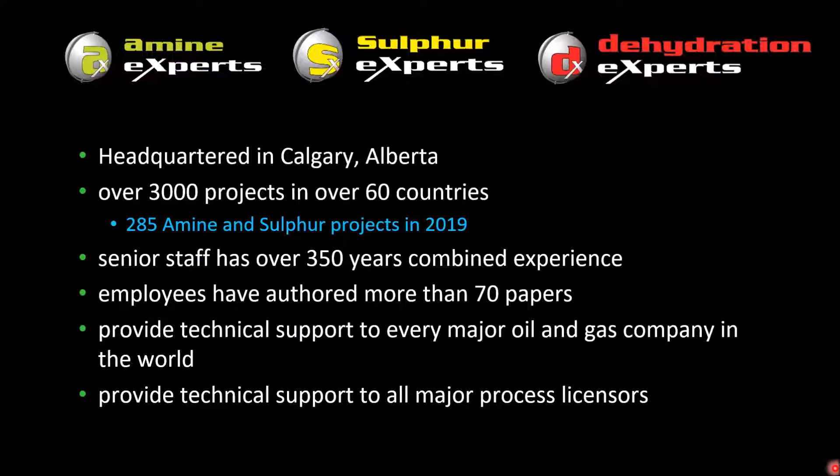So just a quick review of session 1. We talked about the amine process itself. If you can recall, it turned 90 years old last month, and it's a process in which we take sour gas through a contacting device, and with a chemical reaction, we react the amine with the H2S and CO2 to sweeten the gas stream that comes out the top of the contactor.

It's a base contacting an acid, and thus we make a weak salt solution. The salt solution we call rich amine, and that salt is regenerable, and we regenerate it in the regenerator column with steam. Heat helps to reverse that salt reaction. It drives the H2S and CO2 overhead, and that goes out with the acid gas, which can go to a sulfur recovery unit, or acid gas injection, or even flaring depending on what it is, or even venting if it's just CO2. The lean amine that comes back now is cooled, and it's free to go back into the contactor.

So when we talk about some of the problems that we have, when we talk about product quality or meeting specification, we're talking about the sweet gas that exits the top of the contactor here. When we're talking about corrosion, we're obviously talking about anything in the entire process. And foaming is generally going to happen in the contactor and the regenerator.

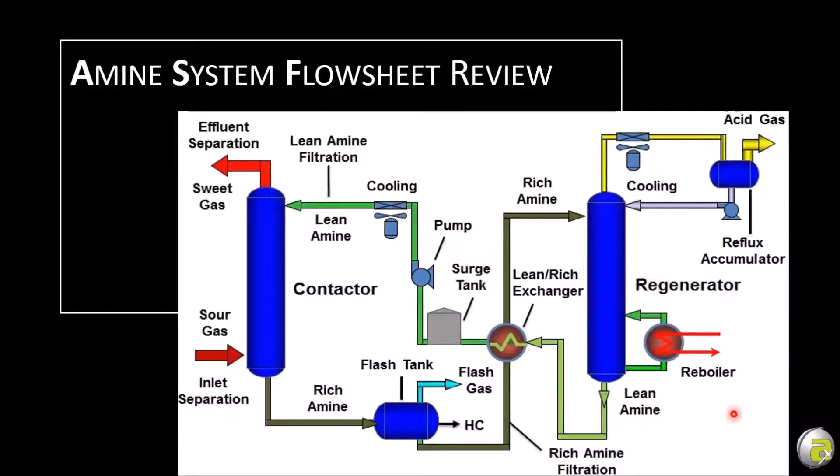So again, we use amine treating for H2S and CO2 removal from hydrocarbon streams. We like to maximize on line time. When I first started in the industry 40 years ago, we had turnarounds every year, but now

we want to run these plants 3, 4, 5 years if we can. So as we get into that 3rd, 4th, and 5th year, it's tougher and tougher to keep on stream, and it's quite challenging. Because the process is 90 years old, we've got a lot of information on it. You can Google amine and read till you're old and gray like me. And the problem is when you've got a problem in your plant site, what do you do? How do you delve into the problem and solve it as quickly as possible?

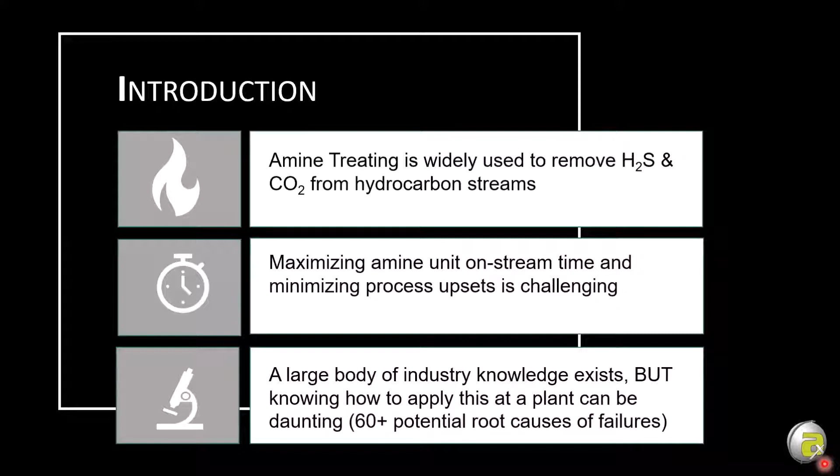The problem is there's a lot of potential root causes. It says here 60 plus. 20 years ago, in 2001, I presented a paper at GPAC called The 7 Deadly Sins of Amine Treating. At the time I said I could have written 7 other 7 Deadly Sins papers because there's so many things that can go wrong in an amine system. So we're going to cover some of those today. Obviously, it was daunting to talk about amine in 40 minutes. It's going to be daunting to talk about this in 40 minutes, but I'll do my best.

So we have a database where we took the data from 400 separate system failures, and we analyzed them completely. Of those 400, almost 300 were ours, and then we took another 100 from the literature. They were basically papers where we knew the author, we did a review of the work that they did and agreed that it was a well-written paper, and that's why we included it. Most of them post 1999, so it would have happened in the last 20 years, say.

And these failures have a cost. They have a cost in lost production, environmental costs, maintenance, and the projects range from 100,000 all the way up to $250 million in lost revenue for the particular client. So failures can be expensive for sure.

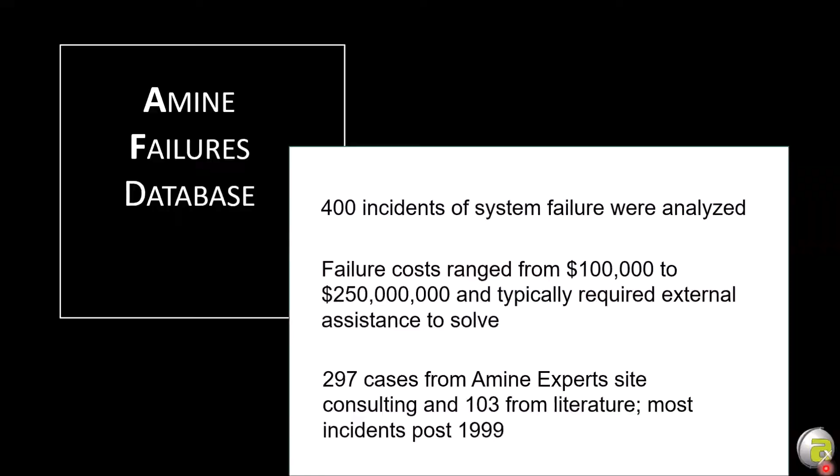Now, we probably could have put this slide together without going through our database, just knowing what we get called to travel the world and troubleshoot on. There's five main ones that came up in the papers, and there's always the 3 that seem to hold court: one is corrosion, one is foaming, and the other one is product quality. What we mean by that is, did I meet my pipeline specification? Did I meet it for H2S and or CO2? There's also some smaller sections on tower flooding or amine losses, but specifically, we're going to spend the rest of this session talking about the big 3 there: meeting spec, corrosion, and foaming.

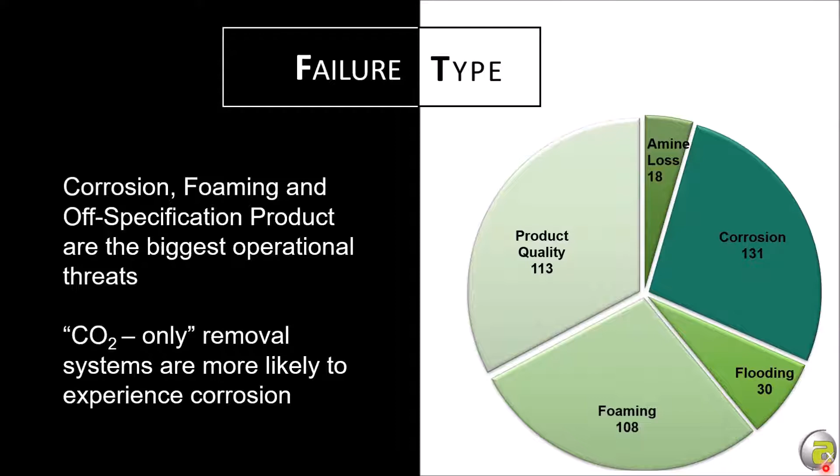So you can gather from that then, if you can do something about controlling these 3 main subjects, you can do a lot to control the downtime of your facility. If you can control your ability to meet spec, keep your corrosion to a minimum, and stop that amine from foaming, you can have a good runtime and decrease the headaches from all the operations staff, that's for sure.

So as far as the way these things lined out, we tried to separate them. We've got one for refineries. We do work in LNG facilities, syngas facilities, carbon capture, but this is strictly from the gas treating focus of our database. The one on the left is processes with greater than 1,000 ppm of H2S in the feed gas, and the one on the right is less than 1,000. So we're calling the one on the right sweet gas. Now, obviously there's H2S in it, and you'd consider it sour gas, but we've just used 1,000 ppm as our limit.

So on the left side, even with sour gas, corrosion, meeting spec, and foaming are still the big 3. And on the right-hand side, as we process more and more CO2 and less H2S, you can see that corrosion now becomes a much larger piece of the pie: 47%. So almost half of the system failures in low H2S facilities are related to CO2.

The simple question that some of you might be asking is, well, why is that the case? What's the difference with high H2S versus low? The huge reason for that is that H2S, although it corrodes steel, it does form a protective film we call iron sulfide. And as you process relatively high H2S gas, you build a nice protective film in all the equipment and piping.

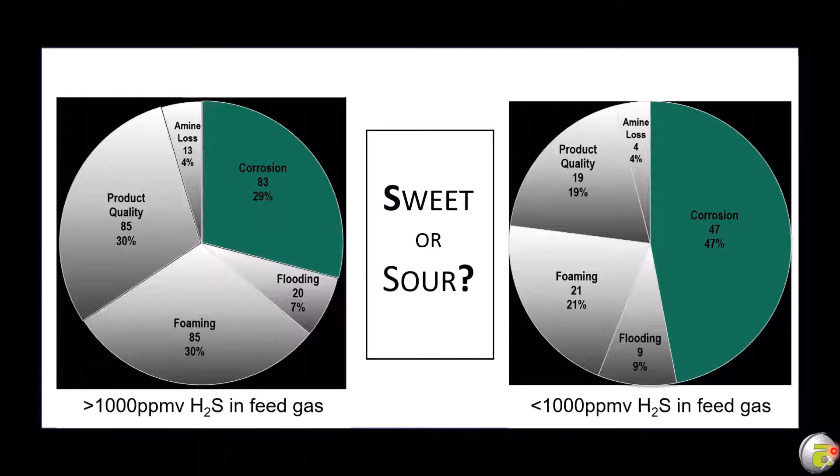So although we hate H2S—it's toxic, and we don't get much for our sulfur—H2S in a gas stream actually does help reduce the corrosion potential because of its ability to form an iron sulfide film.

The first one we'll cover is meeting spec, or product quality. The big question is, if you're off spec, can you afford to flare? Most of you can't afford to do that—you have to shut the plant in. There are jurisdictions in the world where people can get away with flaring for a short or long period of time. But the cost to you is in lost revenue, environmental considerations, and the good neighborly pact you made with the people around you that you will not have these flaring episodes.

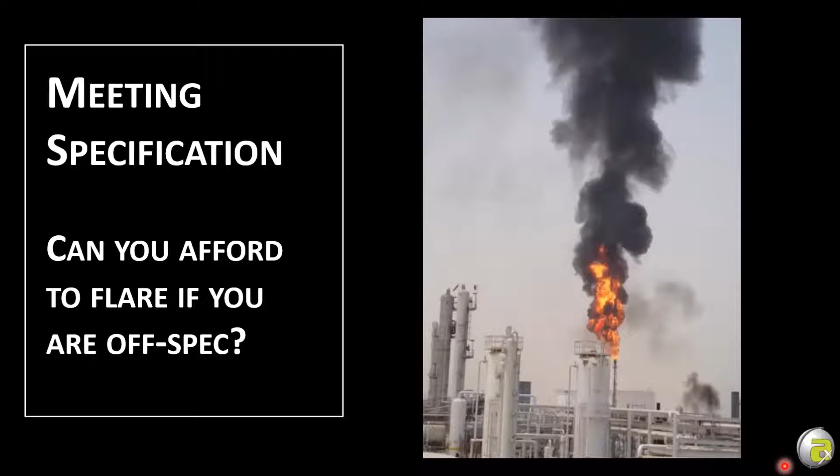This particular picture is from a plant in the Middle East where I did some troubleshooting work, and this flare went for 6 months before they called us. They were flaring 60 million of sour gas with lots of hydrocarbons for 6 months. I liked it because that's how I found the plant—I just followed the flare. Once we solved the problem and there was no more flaring, everyone around thought the plant had shut in, but it was actually processing properly. So you really don't want to have these kinds of environmental excursions.

As far as H2S spec, most jurisdictions in the world are trying to meet less than 4 ppm, sometimes 16 ppm allowable, but with most gas processing we're trying to reduce H2S to extremely low levels to sell it. If we want our amine to do the best job of meeting that tight H2S spec, there are 3 key things we have to pay attention to. The first two we'll call the quality of the amine: the quality of our treated gas—how low the H2S spec is—and the quality of the amine, which is the loading and temperature of the amine that feeds the top of that tower.

We want that lean amine loading—how much residual H2S is left in that lean solution—to be as low as possible for the solvent we're using. That means regeneration is important.

We have to drive the H2S out of that amine solution properly inside the regenerator column. And on the other hand, the lean amine temperature—the lower the better. Cooler amine has a higher capacity to absorb acid gas, which is a big benefit in meeting spec. The secondary knock-on benefit is that cooler amine temperature tends to mean cooler treated gas temperature, which means for any downstream dehydration, the cooler gas holds less water, putting less load on your downstream dehydration equipment.

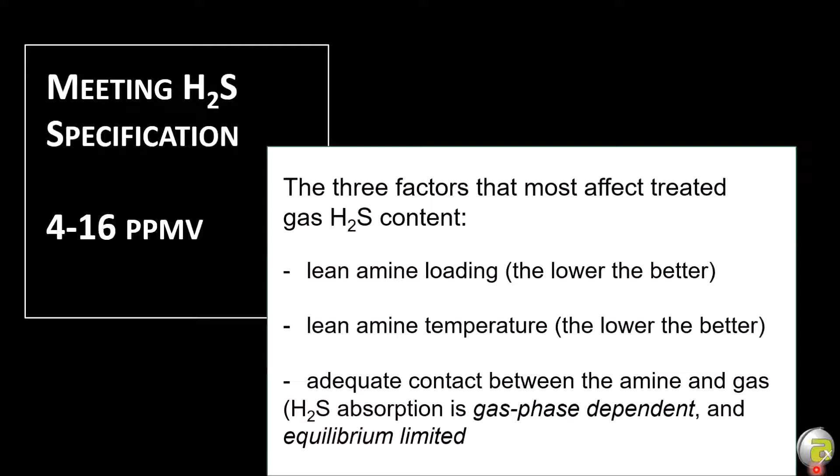For CO2 spec, typically pipeline spec is less than 2 mol%. If you're feeding gas to an LNG facility, we need CO2 down to less than 50 ppm, because CO2 freezes in the cold parts of that facility when we're liquefying the natural gas. So we need to keep CO2 out.

CO2 needs cool amine, good contact, and a well-regenerated solution, but also remember that different types of amine react differently with CO2. Primary and secondary amines, like MEA or DEA, react very strongly with CO2, so we tend to leave ppm ranges of CO2—they can easily meet pipeline spec. Tertiary amines, like MDEA, and hindered amines like Flexsorb, allow for slipping some of that CO2, so we can custom-make our process.

Now, especially with MDEA or MDA type solvents, which most of us are using nowadays, the CO2 absorption is kinetically limited. The warmer the temperature, the more CO2 reaction there is, but the warmer the temperature, the less capacity the amine has. So we always have to be concerned about temperature, and we tend to say it's liquid phase dependent.

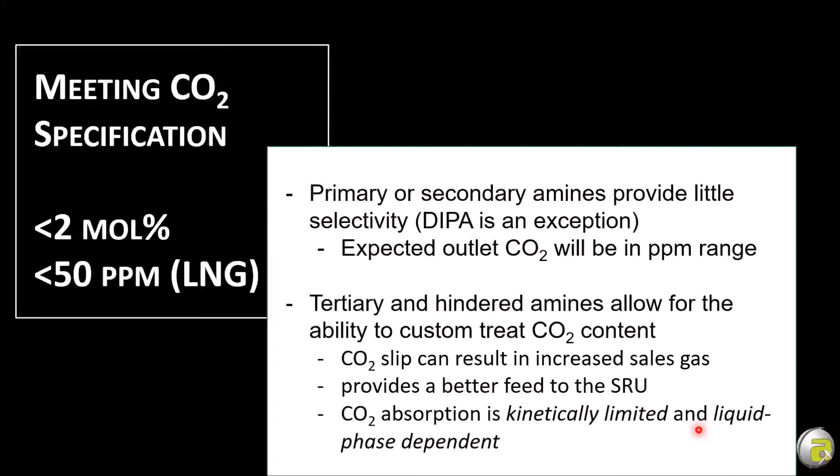H2S absorption is rapid, almost a surface reaction, whereas CO2 is more bulk fluid reactivity. So CO2 removal depends a lot on how much amine I pump into that tower, or how high the weirs are in our tower to give us a higher liquid level on each tray. So we say it's liquid phase dependent.

Now, what did the database tell us about meeting spec? The biggest one was high lean loading. Down here at 38 of all the opportunities, 32 was insufficient heating or cooling, which is basically the temperature. Here's the quality of the amine, the loading, and the temperature. And also we've got contact.

So mechanical damage and insufficient contact kind of go hand in hand. If the towers or trays are damaged, we don't get good contact. So these two are kind of hand in hand.

And we found exactly what everybody says: if you can regenerate your solvent and keep that temperature in control and make sure the contact is working, then you're going to minimize the majority of your problems with meeting specification.

Some of these other ones, like the phase envelope - if your amine is colder than the gas, you're going to condense hydrocarbons out, so that can be problematic.

Under circulating is a problem where you don't have enough amine into the tower to account for the quantity of H2S and CO2 that are in the feed gas. Amines cannot infinitely hold acid gas.

They get full, like we do at a buffet. So if you don't pump enough amine into the tower, eventually it gets full, and whatever H2S has not been previously absorbed will pass right through the tower and go out with sales.

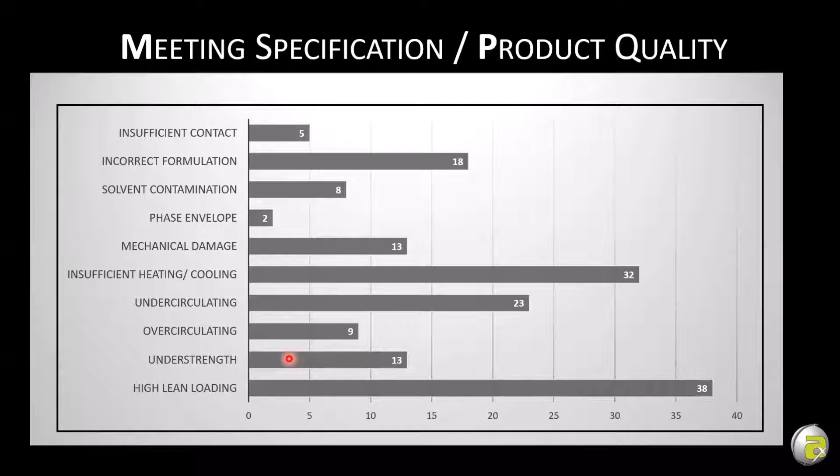And under strength - you need to have a certain quantity of amine in your circulating solution to account for how much H2S and CO2 is coming in with the feed.

So a couple of pictures, a few things. This was a plant that was supposed to make less than 100 ppm of H2S. It happens to be a refinery, but I can show you the pictures. They were actually processing at rates above 1,000 ppm on the outlet of the contactor.

So obviously something was wrong. We went through all the amine parameters. They were circulating the right amount. It was well regenerated, the temperature was good, and it's still not working. So what can you do to check?

One of the things you can do is run a gamma scan, which we show in the top right corner here. Typically a gamma scan will show where every tray is. And if any of you have ever seen a gamma scan, you know that this particular picture shows there aren't any trays in this tower - they're missing, or parts of them are missing.

So when they shut the unit down and we went inside, all the trays had completely buckled. There wasn't a tray left in position. And obviously if there's no trays, you don't have intimate contact between the gas and the liquid, and there's no removal of H2S. It did a remarkable job taking it from 2% down to 1,000 ppm of H2S with no trays, but we certainly don't want our towers to work that way.

High temperature - we don't have this problem so much in Canada, but I understand there might be some Middle East people who have checked in here today, where ambient temperatures can exceed 45 degrees. It's a big problem.

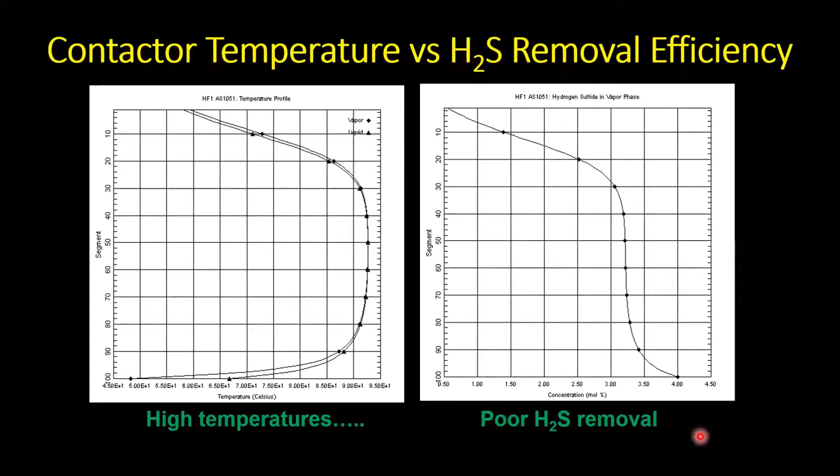So temperature is a huge issue. This is a particular client that couldn't meet spec. This is a CO2 removal facility for an LNG facility, and they could not meet spec. When I ran the simulations, this is the simulated temperature profile.

We don't like to have amines above 85 degrees C because they have the potential to liberate acid gas, and at high temperature they also don't want to absorb CO2 or H2S. So they didn't believe the simulation. We went out with a thermal imaging camera and took a picture of the contactor, and you can see it's white hot in many cases, which is more than 95 degrees, matching the simulation. So when we have an extremely high temperature inside the contactor, it's bad for corrosion, bad for performance.

But how do we solve that problem as quickly as possible? The key is when we have an excessive temperature in the tower, we need to pump more cold amine into that tower to drive that temperature down and out of that column. So in this case, we have to raise the circulation rate by 20%.

And the simulation predicted a typical profile where all the heat's at the bottom few trays of the tower. We have a nice cool top of the tower, 40, 43 degrees, lots of capacity, lots of absorption. Then we went out and took the thermal imaging camera, and you can see that the simulation matched what the thermal imaging camera showed. Nice cool 40, 43 degree top part of the temperature, lots of final absorption, easy to meet spec, all the reaction at the bottom of the tower and at temperatures less than 85 degrees.

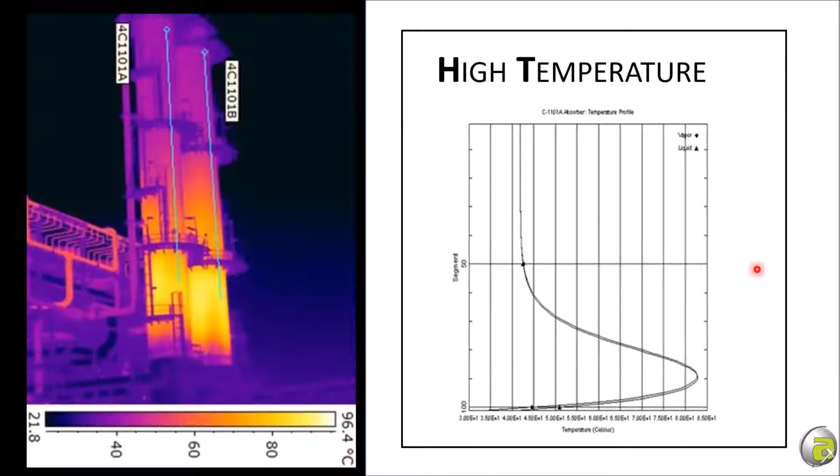So if you have a simulator, you can predict trouble, and you can use a thermal imaging camera to make sure that you're actually seeing it. But these are all tools that you can use to improve performance at high temperature. So that's it for meeting spec. In the interest of time, we have to get on to corrosion.

Corrosion has many aspects. There are three separate ones here. The first one is galvanic corrosion. What you're looking at is a regeneration tower from a plant in Alberta. They could not regenerate the amine, even though they had a high overhead temperature and the steam was getting to the top.

They took the plant down, and on every single tray in the regenerator, there wasn't a single valve left on any of the trays. So the reason they couldn't regenerate is because they can't hold liquid on this tray deck, because there are massive holes on the tray deck. What you're looking at here, if you can see my pointer, there's a valve. Now that valve is a smaller diameter than the hole. Originally, that hole was a smaller diameter than the valve.

The reason we got a galvanic effect is because we have stainless steel valves on a carbon steel tray deck. Wherever that valve lifted and dropped and rotated, it contacted the carbon steel and ate up the carbon steel. So it looks like somebody came with a hole punch and just made larger holes here, but that's galvanic attack. Very sharp defined edges, and this tower doesn't work because of corrosion based on really bad choices to put dissimilar metals on a single tray deck. Never use stainless steel on a carbon steel tray deck.

This one was related to poor design of a reboiler bundle. This is also a plant in Alberta, and the reboiler bundles are completely chewed up here. As you can see, there's no steel left in many of these places.

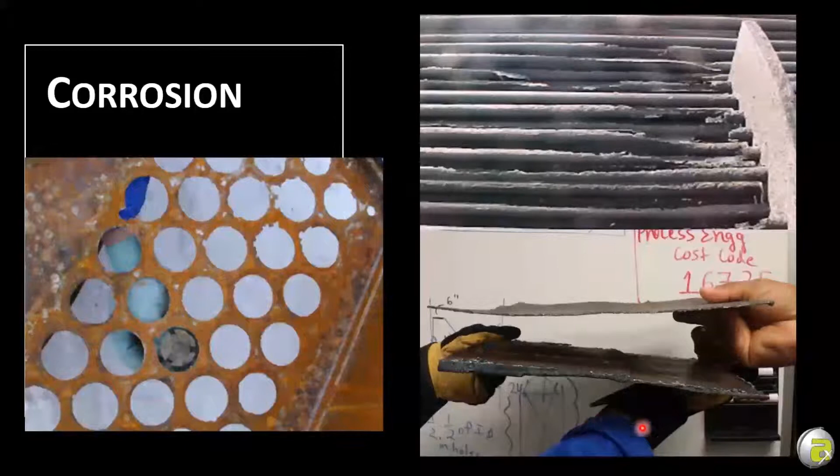A heat-stable salt is whenever I get a stronger acid than H2S or CO2 into my process, it reacts with the amine and makes a strong salt, and the salt is non-regenerable. So we say it's heat stable. We can't break that salt apart. So it builds up, and because we're retaining an acid, it drops the pH of the fluid and the acids attack the steel. So many different ways that we can get corrosion.

So what did our root causes say? The highest one of all was understripping, and also high lean loading. So 52 and 27, that's almost 80 percent of the total root causes related to failure to properly regenerate the solvent. We cannot be leaving high H2S in the amine that goes down to the reboiler and in our lean piping, because a lot of that lean piping is hot. We have to remember that corrosion is a chemical reaction, and all chemical reactions proceed faster and more aggressively at high temperature. So whenever we've got acid gas and high temperature in the same place, we're just asking for trouble.

We've got issues with design. I guess we can loosely put most of these problems related to design. We've got some operational issues, and we always have amine hygiene issues. How do we take care of that amine solvent? Do we build up a lot of heat-stable salts? Do we not filter it properly? Is it degrading because of temperatures or what's coming in with our feed?

Did we design the right metallurgy for the application? Did we overload that solution on the rich side? Did we not size the piping correctly? Is there vibration in the reboiler bundles, in the piping?

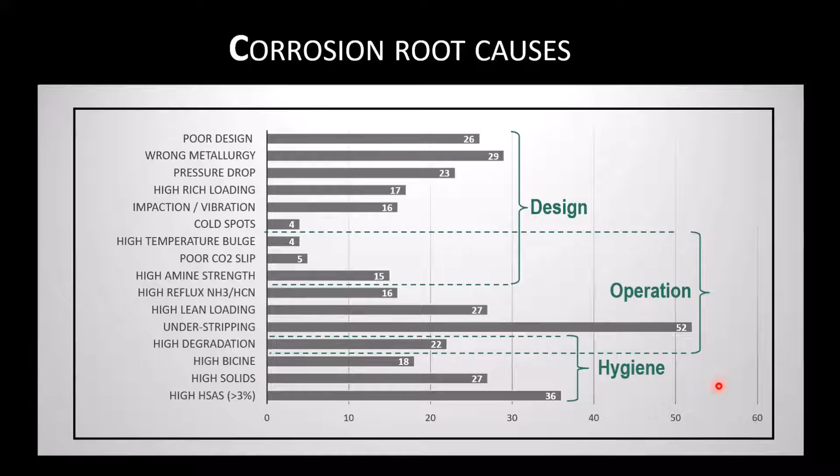So this is a really interesting part of the database: where exactly did the corrosion occur? I'm going to start here at the bottom where it says system-wide, 15. So out of these 131 cases, only 15 are what we would consider system-wide, which means there was corrosion in the reboiler and the absorber and piping, and it was all over. Not all from the same mechanism, but they had system-wide corrosion.

Now, one thing you will note is that if you're operating a plant or you're an engineer in charge of that plant, corrosion is generally highly localized. You never go to a plant turnaround and see corrosion in every piece of equipment. Corrosion is very highly localized. So this number made sense to us. And a number that might not make sense to many of you is if you understand that H2S and CO2 are corrosive, and you look at an amine flow sheet and say, okay, where's the most acid gas? It's right here, and it's right here in the rich amine solution, and obviously up here in the acid gas.

Right here where the rich amine comes out of the bottom of that absorber and then into the tower, this is the most highly loaded part of that amine solution, yet it only has 9 corrosion events. The ones on the lean-rich exchanger were primarily on the lean side, so really only 5 events on this rich piping, and that's where we have the most acid gas.

So how does that make sense? It makes sense because this temperature is moderated here. It isn't until we start to heat up the rich amine that we can have rich amine issues. So temperature is a key.

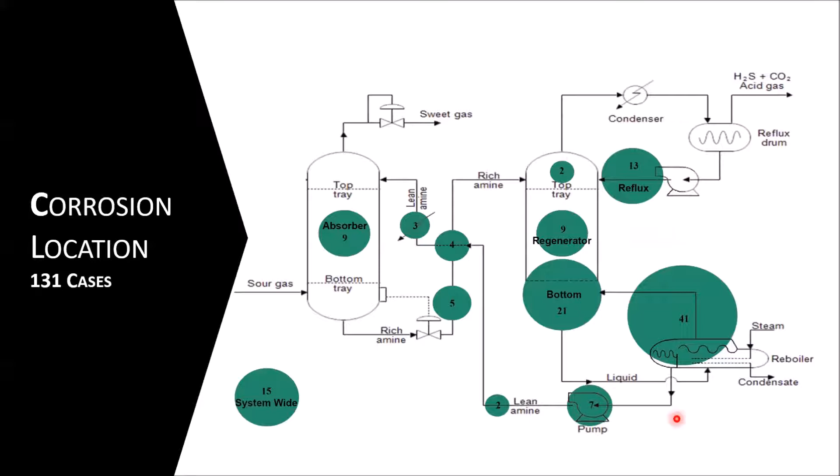As far as all that corrosion that occurs in the reboiler and the bottom part of the regenerator, the big driver of that is the fact that you have not stripped inside the column itself. You have to regenerate inside the tower, not in the reboiler.

And why does that happen? The first case is insufficient steam traffic up the column. You need to have enough steam that you have a proper overhead temperature. Typically that's over 100 degrees C as your overhead temperature to the top of that still. You want to make sure that your lean-rich exchangers are working, that you don't have temperatures below 90-95 degrees C rich amine feed temperature.

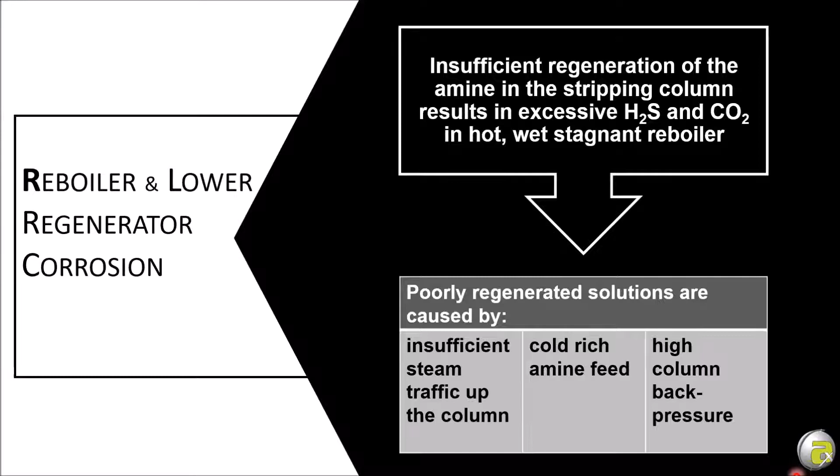And you have to make sure that you don't have a high column back pressure. The reason for that is the higher the reboiler pressure is, the higher the boiling point of the fluid, the harder it is to generate steam at high pressure. So our goal is to not have a high back pressure on the reboiler so that we can generate the maximum amount of steam that we need to regenerate the solvent inside the column and not down in the reboiler.

Some glorious pictures of corrosion. This is a lean amine cooler - massive attack. This is the bottom of a regenerator. You can't see all these numbers, but this is a 0.225 inch pit on a 0.25 inch corrosion allowance, so we basically made our way 95% through the corrosion allowance. This was a 0.12 inch pit, and yet this part of the plant here, it's exactly the same width of steel as you had when the facility was built.

So pitting type corrosion is dangerous because if you're not checking the right locations, you can put a pit in the side of a vessel before you're even aware that you've got corrosion going on. And how do I recognize a CO2 pit? Here's some classic CO2 pits in this thing - they're sharp-edged, flat-bottom pits. So this is classic CO2 attack on the head of a reboiler.

This is the reboiler bundle. This plant decided they were overstripping their solution and they were going to leave more H2S to build a protective film on the lean side. The problem with leaving more H2S in the lean is that you also leave much more CO2. So they didn't leave enough - they left more H2S, but not enough to provide a protective film, but all the extra CO2 that they left in the amine hit the reboiler and chewed up the reboiler bundle. So this was a catastrophe caused by poor decision-making on overstripping a solvent.

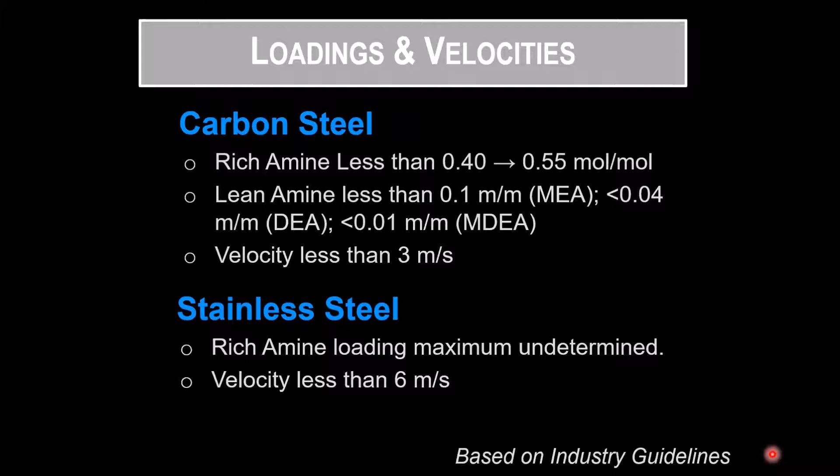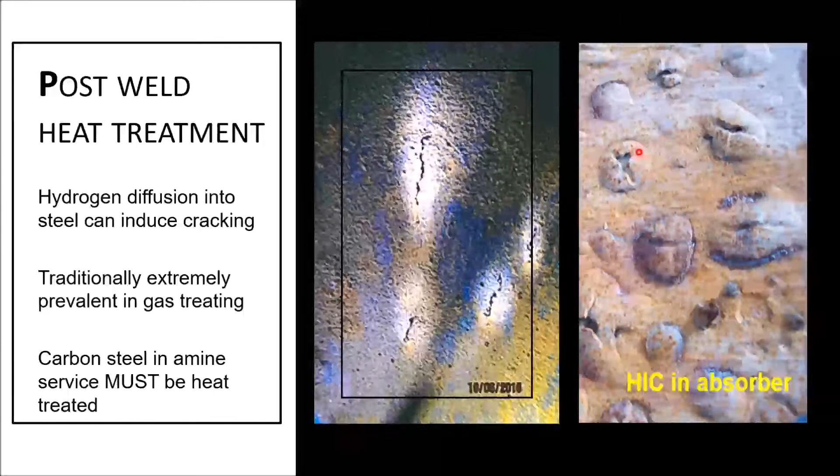So I wanted to include one final thing here in corrosion, that's hydrogen diffusion. We don't see a lot of it anymore because plants are built now with what's called HIC resistant steel, hydrogen induced cracking, HIC resistant steel. If you're going to build a new plant, it should be built with HIC resistant steel. The reason we're doing that is we're trying to control these hydrogen cracks that can form inside the steel.

And I wanted to include this film. It's tragic, but it's the reason why we do post-weld heat treating on all our amine processes. NACE has recently relaxed post-weld heat treating on MDEA and lean locations, but I leave that as a corporate decision on what you choose to do.

So this is a refinery, not a gas plant, but it was an amine unit, MEA contactor. It was 14 years old. The operator, about 5 years after service, had severe corrosion in the base of the contactor. So they replaced the bottom head of the contactor, and they welded a new sump at the bottom of the absorber column. And they didn't post-weld heat treat the weld that they did on the facility.

So a few years later, they found more corrosion. They put a Monel lining in that bottom head, but the Monel lining didn't go up to the weldment. And a few years later, an operator was doing his rounds and he noticed a crack.

And the initial crack that he saw was about a 6-inch crack. And then by the time he tried to shut the gas down, cranking the valve, and he ran back, it had made its way almost to about 600 millimeters by that point, which is a very large crack.

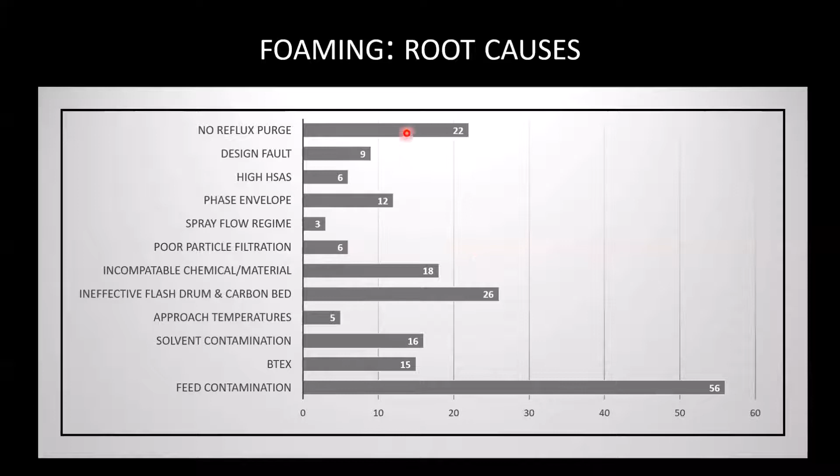So a good large separator to handle large liquid loads, followed by a filter, followed by a coalescer is ideal. Reflux purge, we'll show you a bit about that. Ineffective flash drum - if you don't control the feed contaminant coming in, how do you control it when it's in there? With your flash drum, your carbon beds, your filter systems, and your reflux, believe it or not, is a good way to eliminate foam promoters.

What are the types of contaminants that can come in? The big ones in gas processing are compressor lube oils, pipeline chemicals. If you're doing corrosion inhibitors in the field, any kind of chemicals you're pumping in - a lot of those are surfactant heavy because they need to coat the pipeline. And another word for surfactant, when it enters an amine system, is soap. So most of these chemicals will turn amine into a soap if they enter your process.

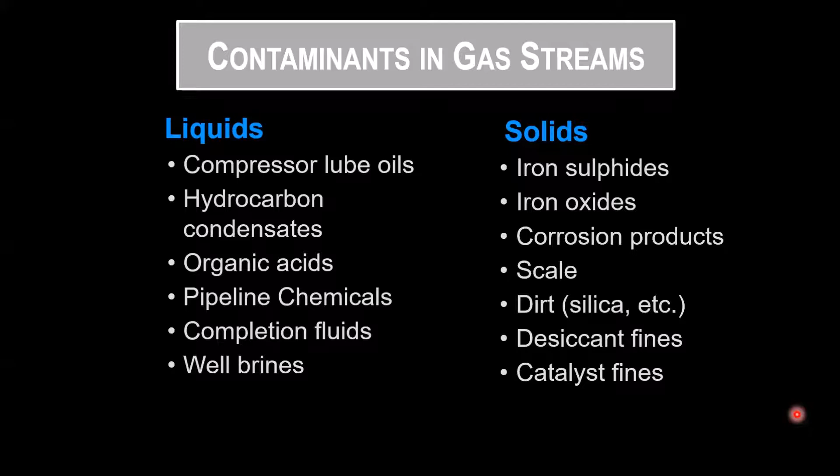It's nice to have a tie-in for a filter upstream of the coalescer to protect the elements. These are very expensive elements. Filters are a little bit cheaper, so we don't really want this to become a solid filter as well - we want it to coalesce. And it's nice to have a tie-in for a water wash, because sometimes you might not have a gas with enough liquid to properly get a coalescer to work. So if you can tie in a water wash to get some coalescing started, these vessels work better.

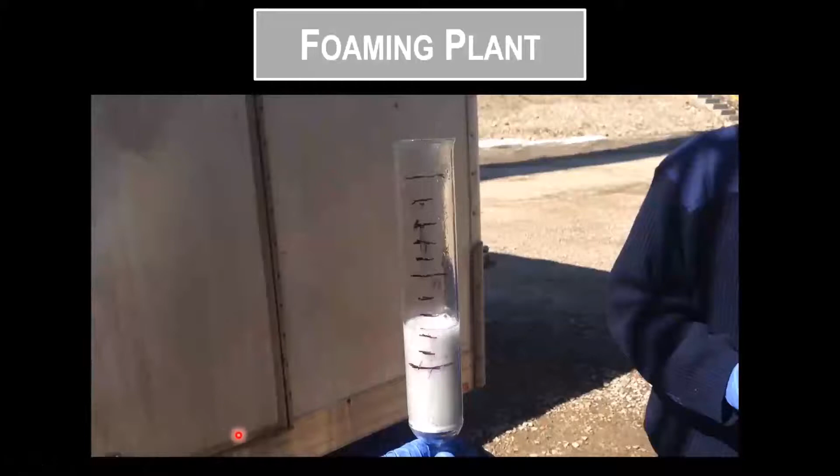So foaming - this is an amine solution. We're doing a foam test, not that much foam, so our start level is there. This is going to be a sample of... [technical difficulty with video] There we go. So this is inlet separator fluids, and we're going to pour it into the foam test, and bang.

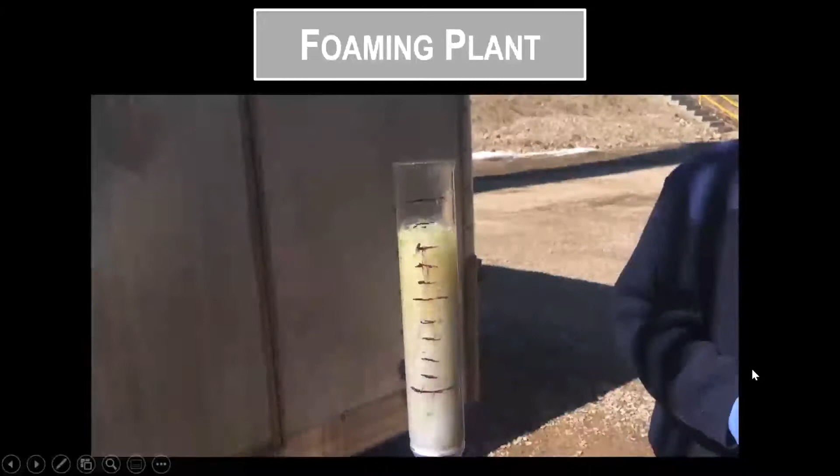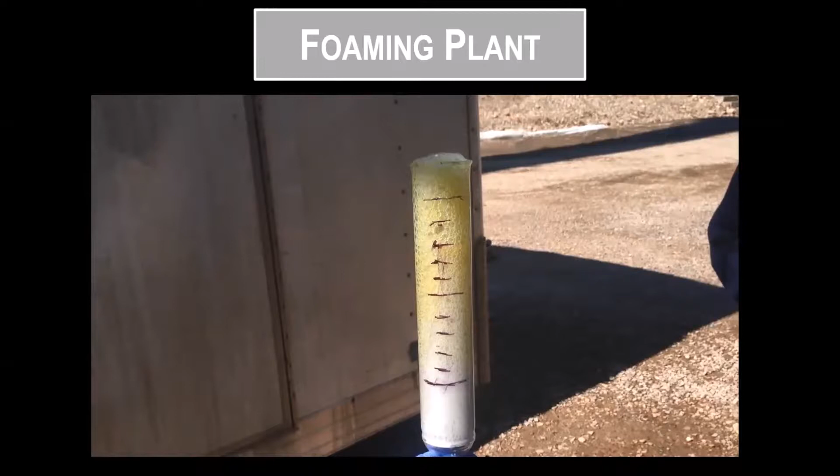So you can imagine if you had a carryover of inlet separator fluids into your contactor, immediately that's going to cause a foaming event that's going to put you off spec and carry amine downstream into your dehydration. So it's important to collect these liquids properly and don't allow them to enter your plant.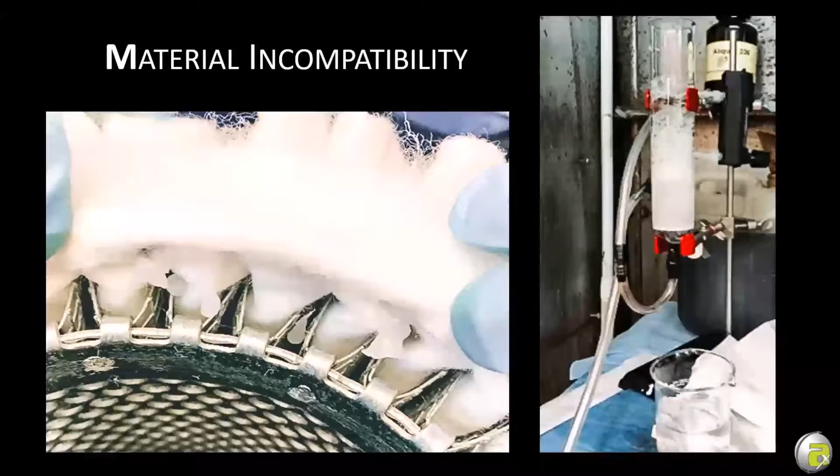And this is a case of bad carbon causing foaming. This is lean amine feeding the filters. This is the lean amine after the pre-filter, and you can see it's about the same foaming tendency. And this is after the carbon bed. The amine foamed worse after the carbon than it did before. That's not what should happen. And then this is eventually the lean after the post-filter that was feeding the contactor. So because we went through filters, a carbon bed and filters, the amine foamed worse coming out of the filters than it did going in. So make sure you're using the correct carbon. Don't use acid wash. Make sure it's a reputable vendor. Carbon can cause you grief.

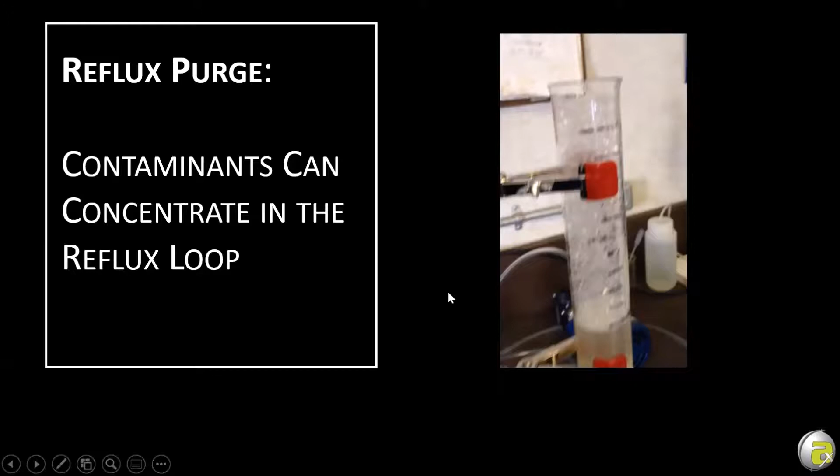And I mentioned earlier reflux purge. The reflux is a great repository for contaminants. A lot of contaminants in your amine process are volatile enough that they might go overhead and then are recondensed. So they tend to concentrate in that reflux loop. And whenever you've got a foam that forms geometric shapes like here, pentagons, hexagons, foaming, as long as they're circles, they're not bad. But once you've got a geometric shape, that's a stable foam.

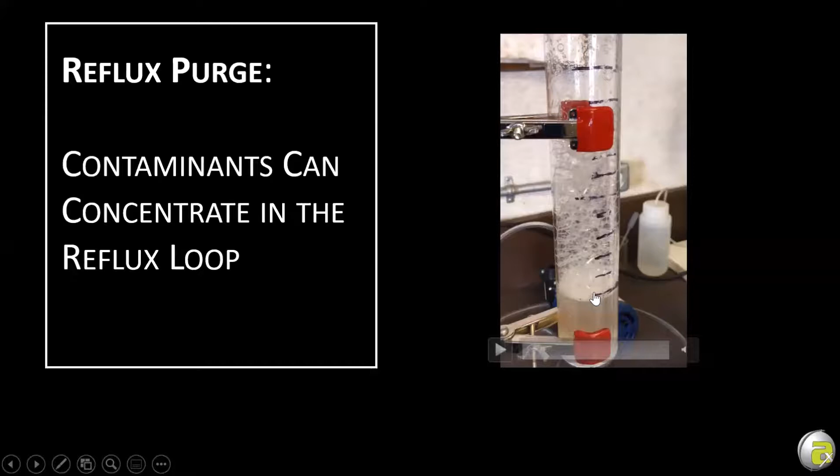So this is a reflux solution that we've done a foam test on. It's a foam that doesn't even break. So you can imagine every time you pump this reflux back into the top of your regenerator column, you're sending that all right back into the process loop. So most gas plants aren't designed to purge refluxes. Refiners do because they have ammonia problems. They need to get rid of the ammonia, so they regularly purge the reflux. But gas plants don't regularly purge a reflux, and it's a good thing in a design case or during a turnaround, if you don't have purge capabilities, to figure out a way to purge the reflux to some dump tank that gets trucked off site, because we need to get rid of these contaminants before they come back in the system.

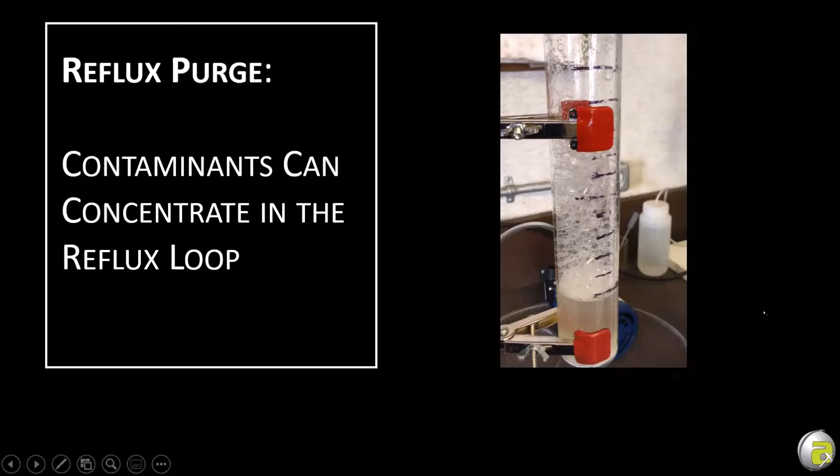And finally, we'll talk a little bit about anti-foam. Anti-foam's obviously there to control foam. Try and keep your doses to a minimum. Anti-foams do not generally dissolve in water. They float on top. So don't use water as a means to dilute the anti-foam before injecting, and try not to overdose.

So how do I know when I have a good anti-foam? The ones on the left are typically what we'll see: silicone, polyglycols, high molecular weight alcohols, and high molecular weight polyalkyl oxalates. Those are the big four that we generally see. And this is a proper anti-foam that should work in your system.

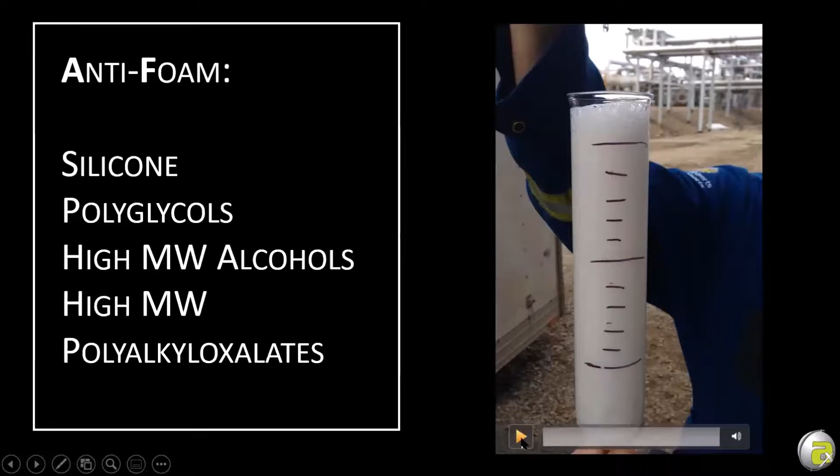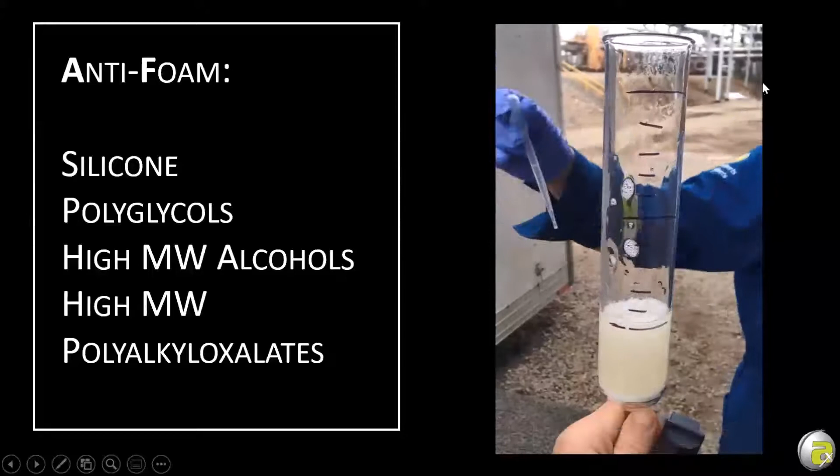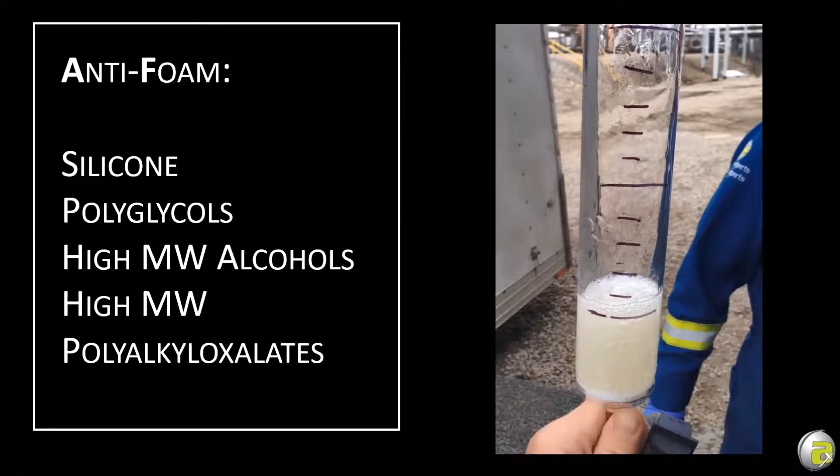So we've got quite a foam inside this particular facility. And we're going to drop some anti-foam in there. Probably could have done with just 2 drops, but bang, down to nothing. And that guy was in witness protection, so he didn't really want to be in the video. But this is what we expect to see from an anti-foam injection. Not only does it immediately kill the foam, but the foam doesn't return. If this doesn't happen in your plant, you don't have the right anti-foam for your facility. And that's something that you can check and test to get you the proper anti-foam.

So in conclusion then, we've got key focus areas for why amine systems fail. What can I do? Number one, for spec, make sure our loadings, our solution is well regenerated and our temperature is under control. Make the amine slightly warmer than the gas temperature, but as cool as possible. Spend money on separation equipment, good inlet separation and good filtration with a high quality filter. Please consider also rich side filtration. Never underestimate the ability to remove solids from a system on the rich side. Do not understrip the amine.

Do not be afraid to regenerate the amine solution. Too much of the world is worried about overstripping the amine, causing corrosion, when in reality, the majority of the corrosion is caused by a failure to properly regenerate the solution. And finally, keep your amine system clean. That means good inlet separation, good carbon beds, good filtration, skimming anytime you can, and control contaminants coming in.

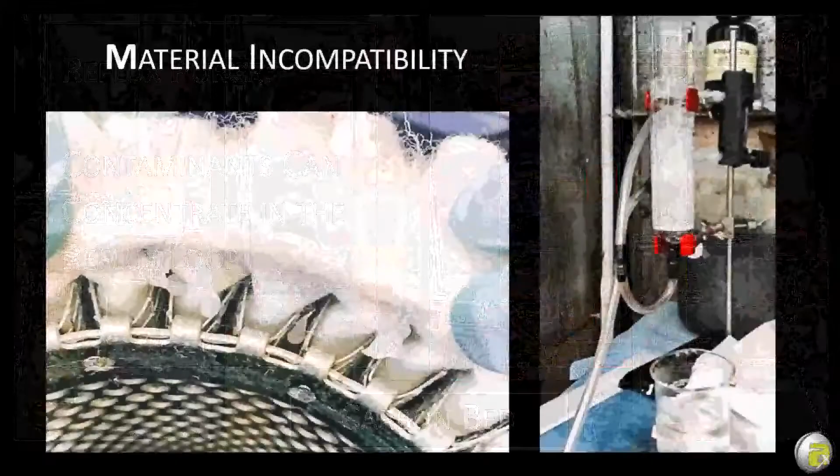Okay good, moving on to the next one about gamma scans: how does the gamma scan look if all of the trays are intact? Yeah, I probably should have put one in if I had room. So basically, let me shoot back to that gamma scan picture.